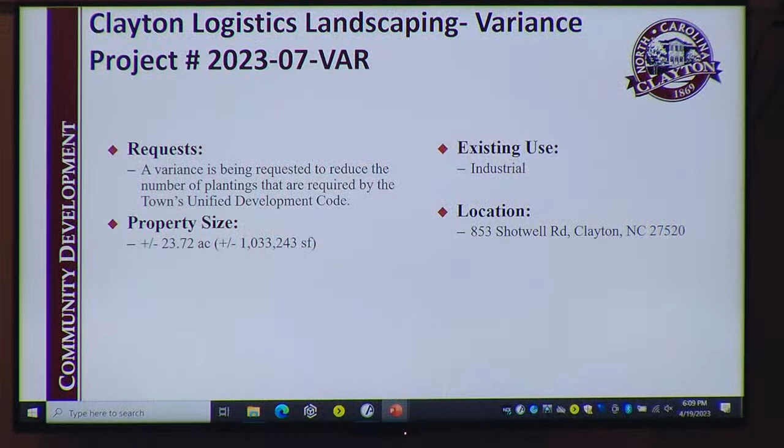Good evening, Chair, Board. Just for the record, my name is Bruce Venable, Town of Clayton Planner 1. I'm here to present the request for the variance for this project. The request is being made to reduce the number of plantings required by code of the town's Unified Development Code, specifically the interior landscaping requirement. The use for this site is industrial. The property size is approximately 23 acres, located off 853 Shotwell Road.

The section of code in question that they're seeking relief from is section 155-402D1, sections A and B. It states: 20% of the total area shall be landscaped. 1 canopy tree, 1 understory tree, and 2 shrubs shall be planted for each 1,000 square feet of required landscape area. Trees need to be evenly planted throughout the landscaped area, but may be staggered or clustered as necessary to maximize visual and screening objectives, and to meet the needs of the particular species for root space, water, light, and air circulation. Landscaping within vehicle use areas may be counted towards the site's interior landscaping requirements. Resource conservation areas may be used to satisfy a maximum of 40% of required landscaping area.

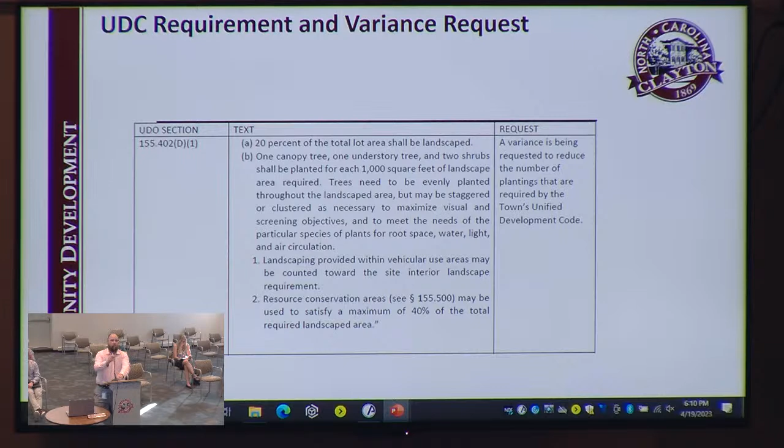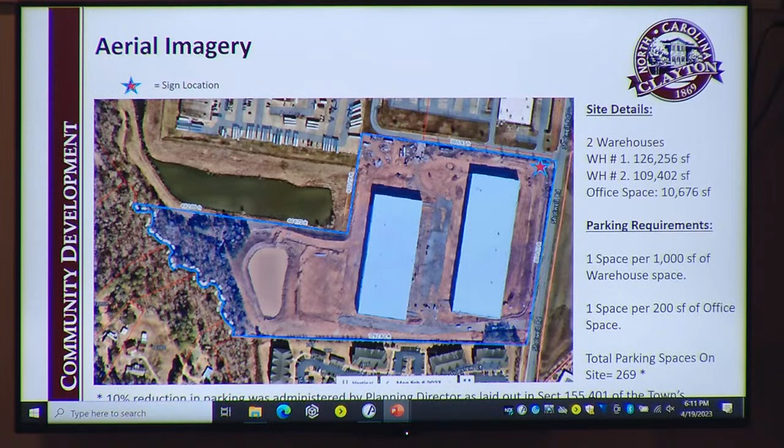Just to bring up to speed, the parking requirement per code is 1 space per 1,000 square feet of warehouse space, 1 space per 200 square feet of office space, bringing the total to above... sorry, it's cut off a bit because of the start bar. The total parking provided on site is 269. This is after a 10% reduction permitted in our Unified Development Code 155-401, where the planning director can make that decision.

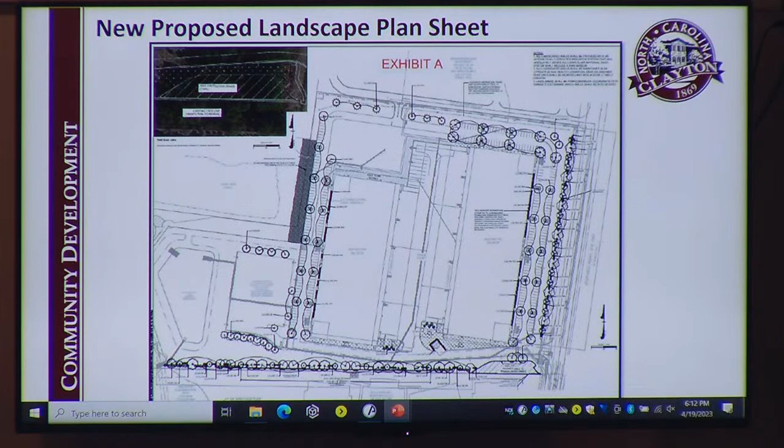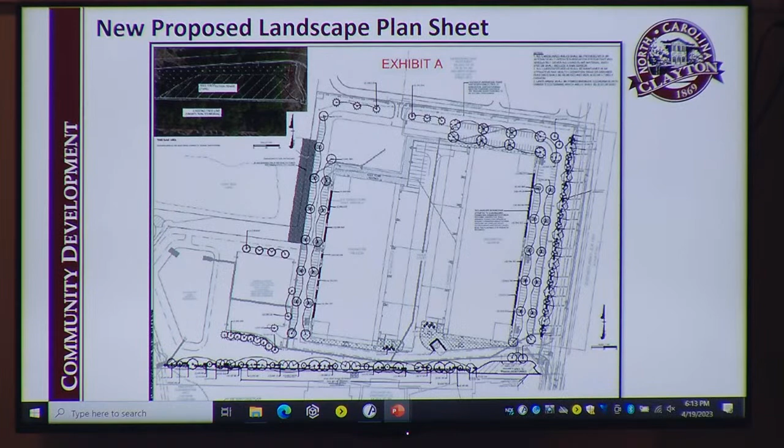Here is the new proposed landscaping sheet. As you can see, there's quite a difference in the number of plantings. There's less crowding. All of the required interior parking landscape trees are present. The required buffers are present along Shotwell Road and into the property to the south.

I will note that the standard for impervious surfaces for this zoning district is 75%. They are currently at 56%, so they're nowhere near hitting their impervious limit. And the building coverage standard is 50%, and their current building coverage is below that as well.

I will allow the applicant to address their findings of fact to you in a moment. I'll just read over the four findings of fact that they're required to cover here, and then I'll provide minimal staff commentary for it.

Number one, unnecessary hardships would result from the strict application of this ordinance. It shall not be necessary to demonstrate that in absence of the variance, no reasonable use can be made of the property. As the site has been developed and built out, there now exists the possibility that strict application of this ordinance may result in undesirable outcomes, which may result in additional financial responsibility by the property owner to replace and maintain these plantings should they be enforced as in the approved plans.

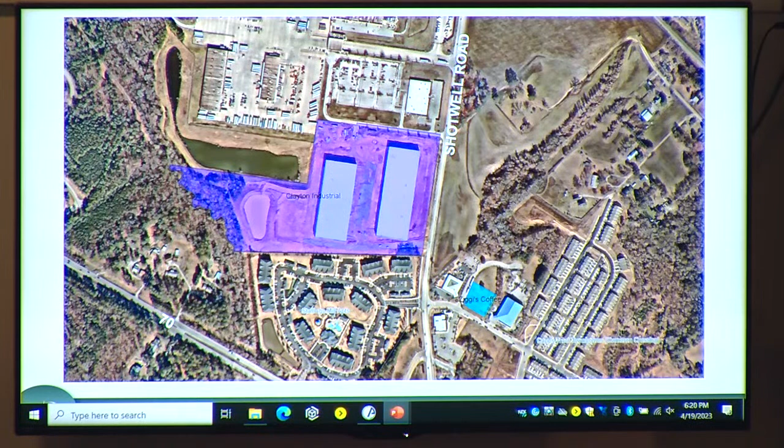This variance relates to the development at 853 Shotwell Road, just south of the Carolinas Distribution Center. To provide some context to this project and the variance request, this site has gone through a number of approvals in the past few years to get to this point, and hopefully this is our last hearing.

Following a recommendation for approval from the planning board, this site was rezoned to the light industrial district in August of 2021. Since then, the site plan and construction drawings received administrative approval in order to allow 2 warehouse buildings with a total of 236,000 square feet of gross floor area, along with the required infrastructure and landscaping improvements.

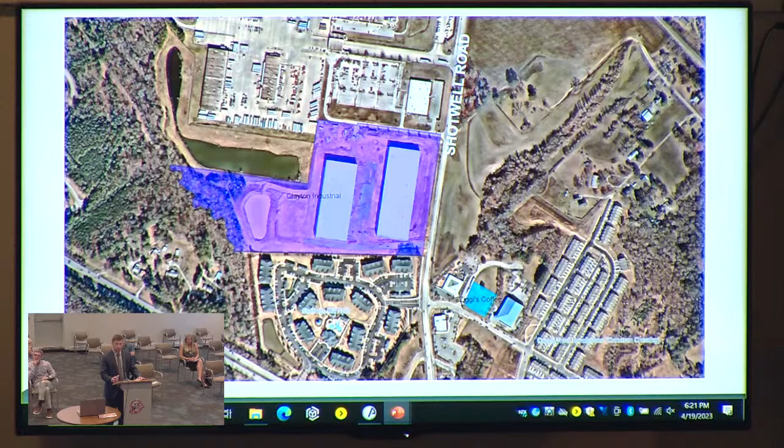The 2 buildings are designed for light warehousing and life science users with smaller local and regional tenants in mind. The buildings can accommodate showrooms in the front with flex space and warehousing space to the rear of the structures. This is distinguishable from the development to the north, the distribution center, which is designed for larger, more frequent transportation needs.

And the timing of this variance request is also not what this board is likely familiar with. These requests are typically presented to you during the site plan phase when these UDC compliance issues are identified and typically dealt with. However, this project is much further along in the process with construction nearing completion.

This was a decision made by my client during the site plan review when the interior landscaping issues were identified. Instead of mitigating the risks of compliance during this site plan review, the decision was made to move forward with the project in an effort to get this project to the market.

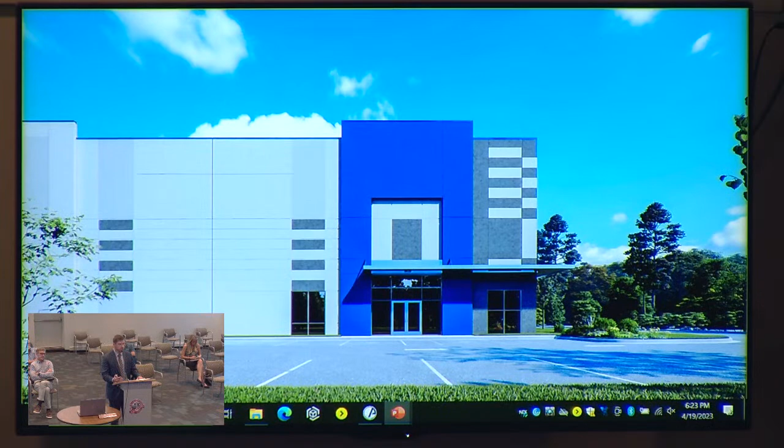So with all of that context in mind, we are here tonight to request a variance to the interior landscaping requirements. The specific UDC section is 155.402D, which requires all site plans, regardless of the type of use, to provide landscaping on 20% of the total site area. This requirement is in addition to the perimeter buffer requirements and the street yard landscaping requirements.

In order for this variance to be granted, we have the burden of producing the information and evidence as to how this request meets the findings described in the UDC. We do have a landscape architect who designed these plans here tonight to provide that information. So at this point, I would like to call up Mike Davidson.

Mr. Davidson, please state your name, address, education, and experience for the board. Sure, board, my name is Mike Davidson. I'm a registered landscape architect here in North Carolina, and I've been doing civil engineering work and landscape architecture work here in North Carolina for over 20 years. My office address is 5410 Trinity Road in Raleigh. I have a Bachelor of Science from the University of Tennessee, and again, have extensive experience with all types of land development projects here in North Carolina.

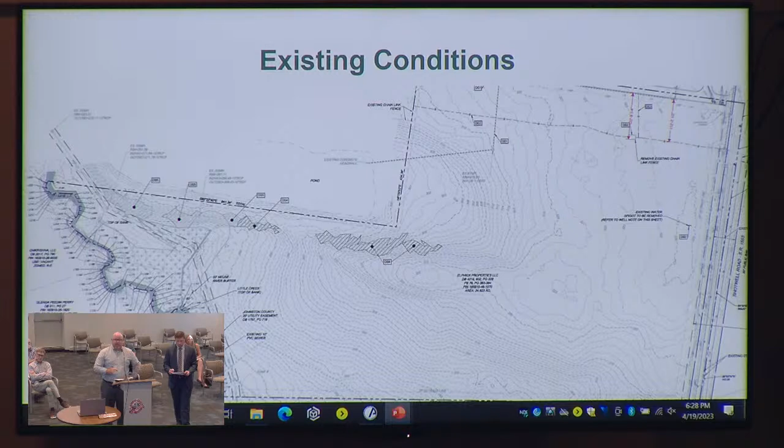That's the existing conditions plan, and Ms. Berry, I can help address the question you had earlier about the slopes. I don't know how familiar the board is with reading topography, but the closer those lines are together, that represents a steepness of slope. So you can see along Shotwell Road it was relatively flat to begin with, but then grades started to steepen and fall off towards the back of the lot before we started doing any site work.

In land development, the first thing we look at is trying to balance the earthwork. We don't want to haul dirt off, we don't want to haul dirt in. We want to just spread it around and try to do it that way. It's most economical for the client, it's better for the environment—everybody seems to win in that condition.

In doing so, we did create some slopes along Shotwell and along City Dump. But again, that was an effort to balance the dirt so that no dirt had to be removed or brought in.

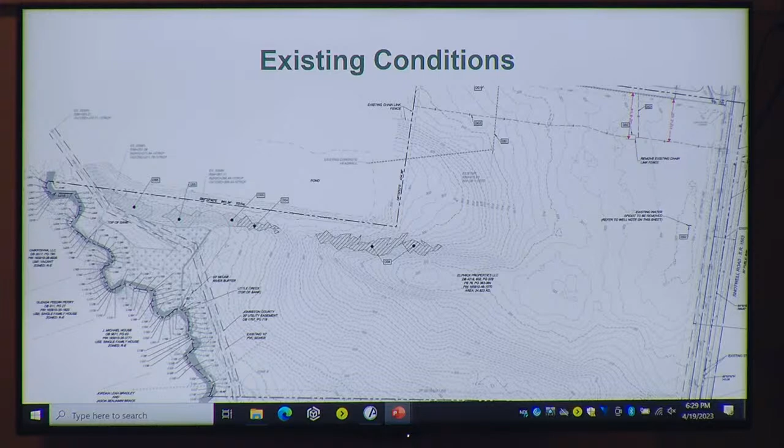Again, the development of the site is not challenging because of the specific use that was proposed. There are other design considerations that made this development challenging regardless of the use—the floodplain, sanitary sewer easements, requirement for stormwater, steeper slopes, et cetera.

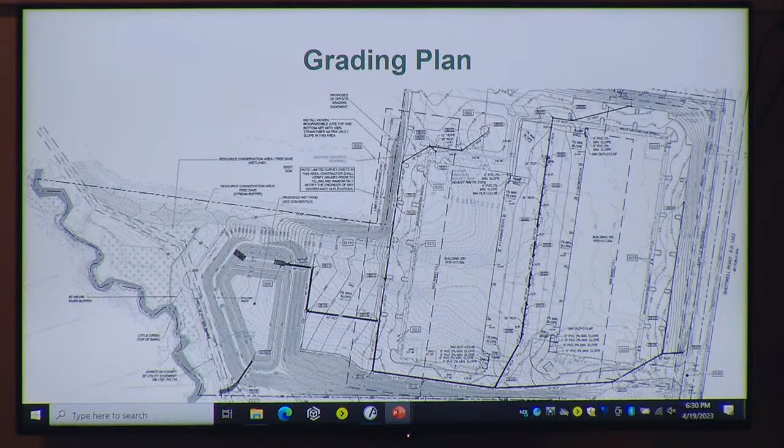If we can go to the approved landscape plan now—there we go. So again, one of the main considerations for landscape architects is not only to comply with the standards in a particular municipality's ordinance, but also for sustainability and thrivability.

We've got a lot of material there that's really encroaching on each other. I would really like to see more areas for planting, to spread those out, to give those trees more room to thrive and survive. But again, we're limited by the amount of topography and steep slopes that we have, and we just really don't have any place else to put them.

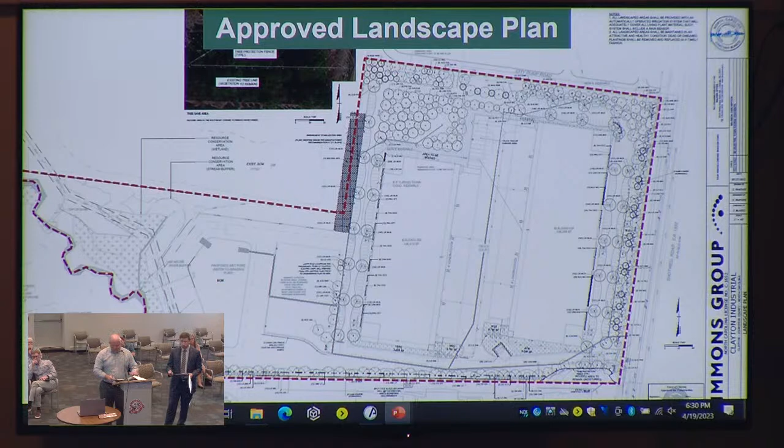Is there any questions that I can answer for the board at this time? Yes, has there been landscaping currently done right now to it? No plant material has been installed yet.

I have a question. You stated that Bermuda grass requires so many hours of sunlight. Is it your testimony that other shade tolerant grasses cannot be planted there? So Bermuda grass is a warm season grass, which does much better in this region than what we would call a cool season grass, which would be fescue.

It's my professional opinion that Bermuda grass is best for the site. It's an aggressive grower. It has a fibrous root system that really does a great job of holding the soils in place. It's an aggressive, fast grower and does best in sunlight, lots of sunlight.

But my question was, are you saying that those grasses would not perform there? Fescue would not perform in this environment? That's my opinion, yes, in this region.

And then my second question is, were you consulted whenever the original site plan was created, whenever it was demonstrated that they would make the plantings that are required by the town? Was I aware of this condition in the UDC? No, were you consulted when the original site plan that showed the plantings was submitted?

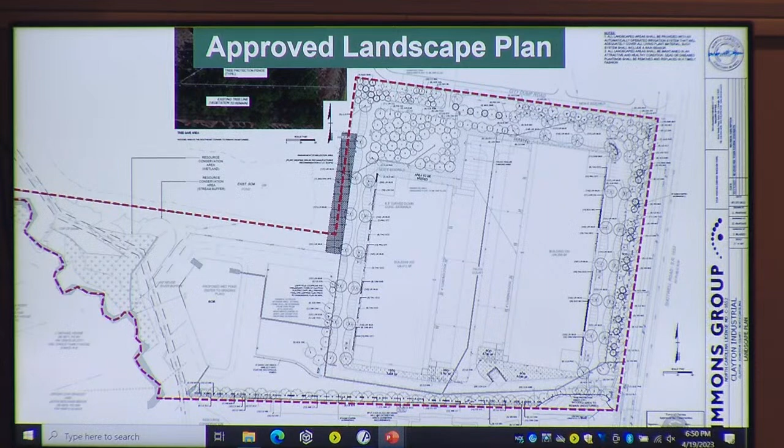Let me move this to the appropriate screen if I can find it for you. The applicant—the original site plan was approved prior to staff's arrival for the town. This particular item is from the administrative amendment they filed, requesting that plantings be moved from the southeast portion of the site to that new location, in order to meet their required interior landscaping requirement by having the plantings moved there. If I may, I'll provide some further clarification for the questions that were asked.

The new area includes 0.85 acres of the conservation resource area, which approximates 37,000 square feet. That, in addition to the 24,000 square feet, comes out to about 61,000 square feet, which is about 5.9 or 6% of the overall site. Just to provide clarification.

So Bruce, I may have missed it. Did either the amended plan that was approved or the original site plan note that area as future parking? If the approved site plan did show it as future parking, the amendment removed that. They amended their site plan, and now this is what, as far as we're concerned, needs to go there unless a variance is granted and the site plan is amended again.

So the amended plan did not show that? No, the amended plan shows the landscaping there. The applicant is within their right to later request and provide a new application, which would then go before the entire technical review committee to determine whether or not it's reasonable and fair. Understood. If I may, the amended plan was just the landscape plan. The other site drawings that indicated it was future parking were not part of that July 22 submission. The approved landscape plan, the approved amendment, is the governing document for this. That site is now landscaped as far as the town is concerned.

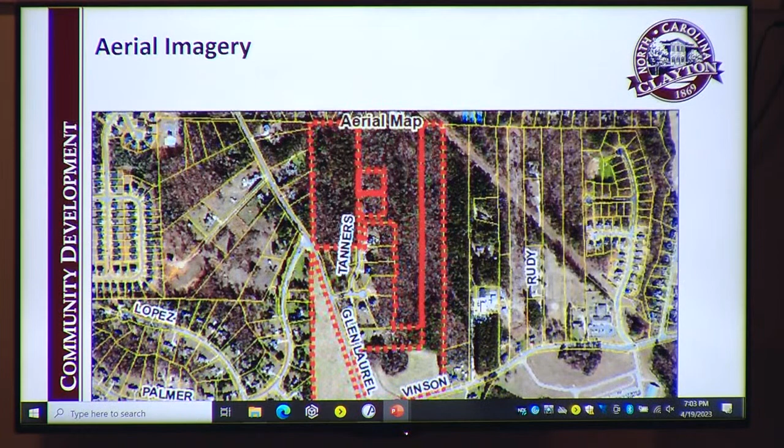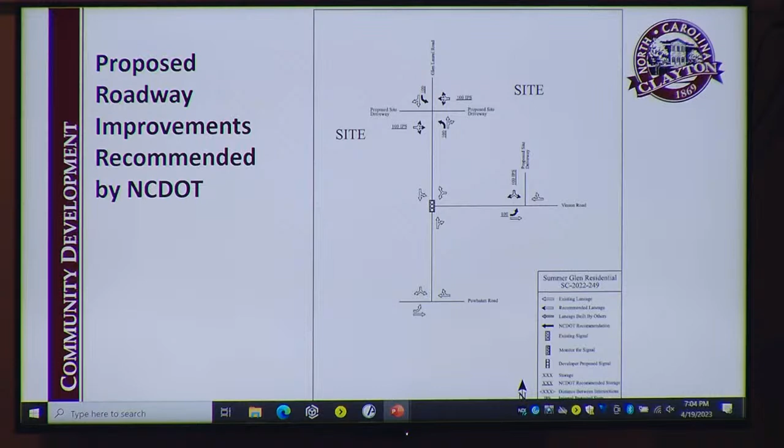This is the proposed roadway improvements recommended or required by NCDOT. As you can see, the only road improvements required are 100-foot-long left turn lanes at their entrances on Glen Laurel Road and a 100-foot-long left turn lane on Vinson Road at their proposed entrance.

The Unified Development Code would require additional frontage improvements in addition to the NCDOT or TIA recommended improvements. As mentioned before, NCDOT for this particular project is only requiring left turn lanes with approximately 100 feet of storage and appropriate deceleration area and tapers.

The 2045 comprehensive plan in the roadway section recommends a 3-lane cross-section with bike lanes, curb and gutter, and sidewalks along both Glen Laurel Road and Vinson Road. This proposed development has approximately 1,500 feet of frontage on Glen Laurel Road and approximately 700 to 800 feet along Vinson Road.

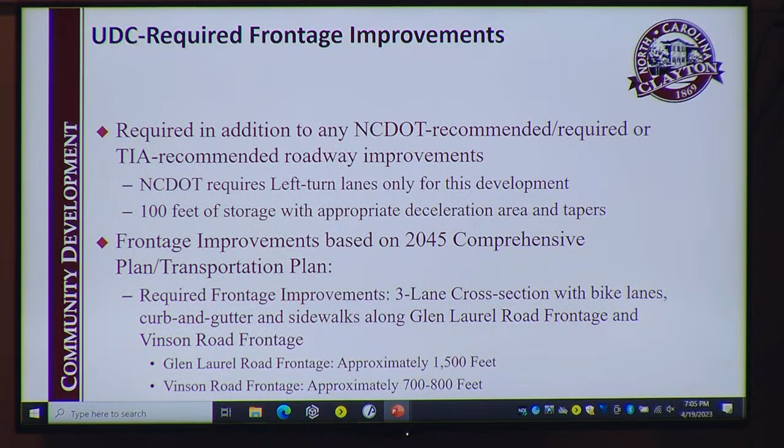For the findings of fact in the staff report, you'll see the findings listed along with the applicant's response and staff commentary. I'm just going to briefly go through the findings and summarize some of the staff commentary, since the applicant is here to present after this.

The first finding is that unnecessary hardship would result from the strict application of the ordinance. It shall not be necessary to demonstrate that in absence of the variance, no reasonable use can be made of the property. The amount of frontage improvements is related to the unique layout of the project and its location along Glen Laurel Road and Vinson Road. The hardship the applicant refers to relates to their specific subdivision proposal, its layout, and the related roadway improvements recommended by the TIA, as well as additional requirements suggested by NCDOT. Public road improvements are required of most, if not all, developments in the town.

Finding of fact number 2 states that the hardship results from conditions that are peculiar to the property, such as location, size, or topography. Hardships resulting from personal circumstances, as well as hardships common to the neighborhood or the general public, may not be the basis for granting a variance. Staff commentary noted that the size and scope of the required improvements relate solely to the proposed project and its corresponding use, layout, and density, which does not constitute a hardship resulting from the peculiarity of the previously mentioned parcels of land.

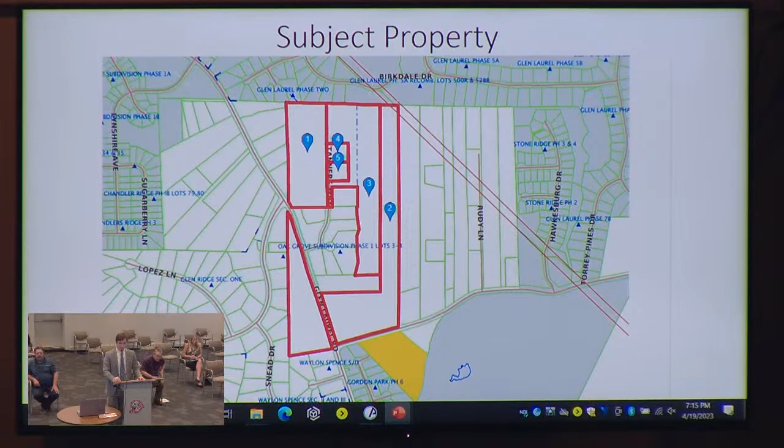Ben did a good job of going through the background information, but just to go through it quickly one more time, this is the site assemblage located in Southeast Clayton, roughly at the corner of Glen Laurel and Vinson Road. Here's an aerial view of the existing conditions on the ground, and here is the current zoning, but as you heard, it's currently under review for a conditional zoning on the property.

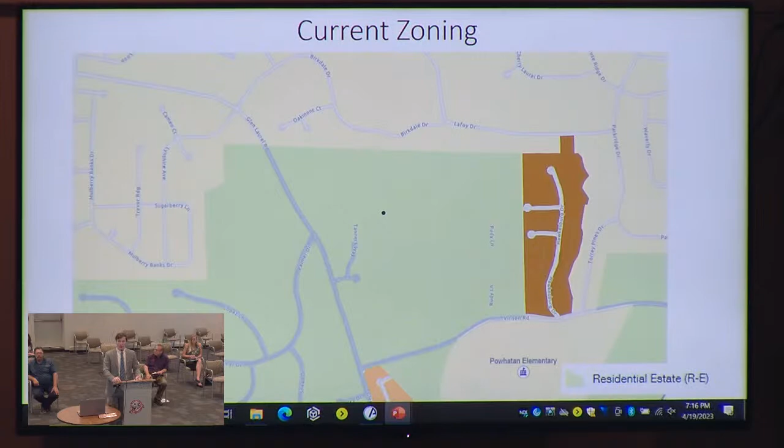So with that, I'm going to ask Andrew Stocks with Stocks Engineering to come give a little more detail about the site specifics. I'm also going to do the tendering of him as an expert.

So just real quickly, Andrew, can you just summarize your educational background and professional licensing experience?

Yes, absolutely. Good afternoon, Mr. Chairman and members of the board. My name is Andrew Stocks. I graduated from North Carolina State University with a degree in civil engineering, and I'm a licensed professional engineer by the state of North Carolina. I have been practicing since 2016, and I've been licensed since 2020.

At this time, we'd like to tender Mr. Stocks as an expert in engineering.

So noted. Thank you. All right, so just to give a general overview of the project, it is located at the intersection of Glen Laurel Road and Vinson Road. The proposed development has around 138 lots. During our sketch plan right now, we are going through a conditional rezoning, as was mentioned, with a master plan.

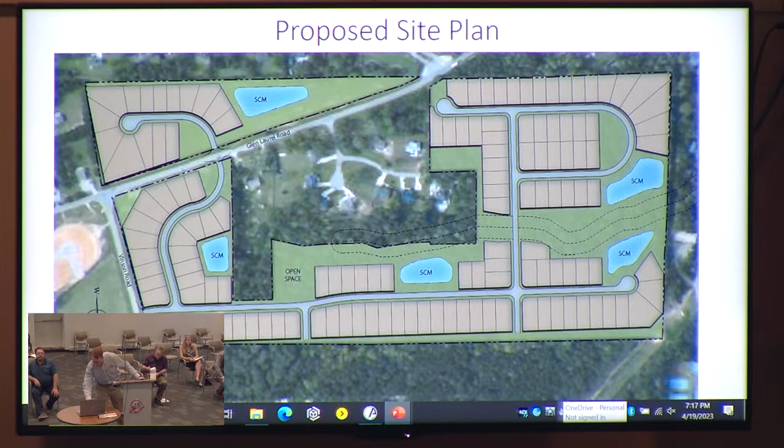So that is why, or I guess the next slide—okay, gotcha. So this is our current master plan that is currently attached to the conditional rezoning request. It is not currently within the town limits, so we will be annexing the property with the development of this project.

The project will have the town of Clayton water, sewer, and electric, so we'll be a customer of the town in those areas.

You can see just with the previous plan with the aerial view and this plan, it is a very unique property with multiple accesses to Glen Laurel and Vinson Road. So we are proposing two full accesses to Glen Laurel Road that are across from each other to access both sides of the property, and one access to Vinson Road.

There will be an emergency fire access in the northwestern corner, which is the top center of the plan where the cul-de-sac is. That will be emergency access only.

The reason we have not shown a full access there is due to the nature of the alignment with the subdivision across the street. The North Carolina Department of Transportation does not like to have roads connecting to main roads that are not aligned—it just provides traffic confusion at those intersections. So we have looked at the opportunity to provide that as just an emergency access where the general public would not be accessing it regularly.

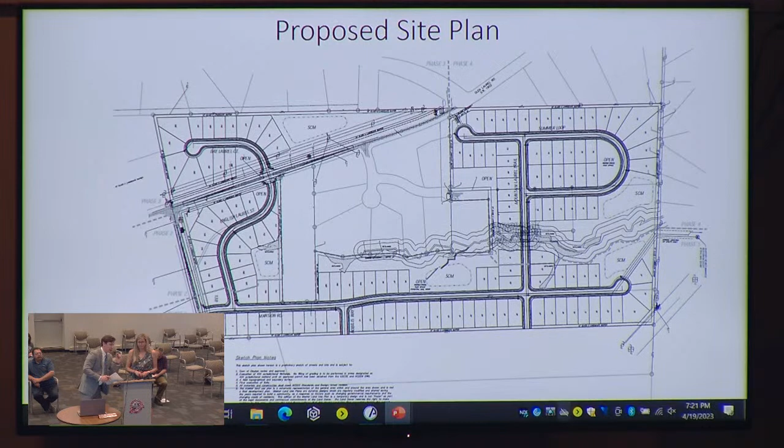Chairman, at this time, I'd like to tender Ms. Chase as an expert in traffic engineering. So noted. Thank you.

We want to take a moment to walk through the roadway frontage widening requirements that would be associated with satisfying UDO requirements. So the aerial shows the intersection of Glen Laurel Road and Vinson Road, with our site to the north of Vinson Road on the east and west side of Glen Laurel.

The roadway system map, taken from the town's comprehensive growth plan, depicts the cross-section requirements for the roadways. You can see that Glen Laurel and Vinson are shown in green, which designates one of four cross-sections listed: 2L, 3A, 3B, and 3C. And we understand that 3C is recommended for both Glen Laurel and Vinson Road.

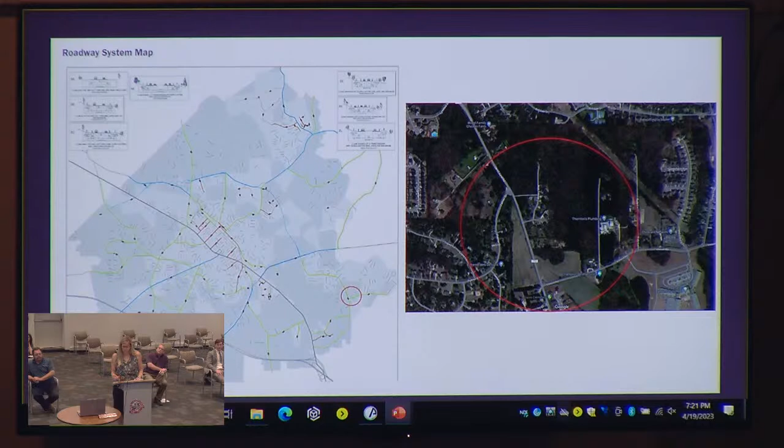As you can see from the slide, the 3C cross-section for Glen Laurel and Vinson requires 80 feet of right-of-way. This would include 3 lanes, 1 in each direction, and a center two-way left turn lane, bike lanes, sidewalks, utility strips, and curb and gutter on both sides, as well as some additional right-of-way outside of those sidewalks.

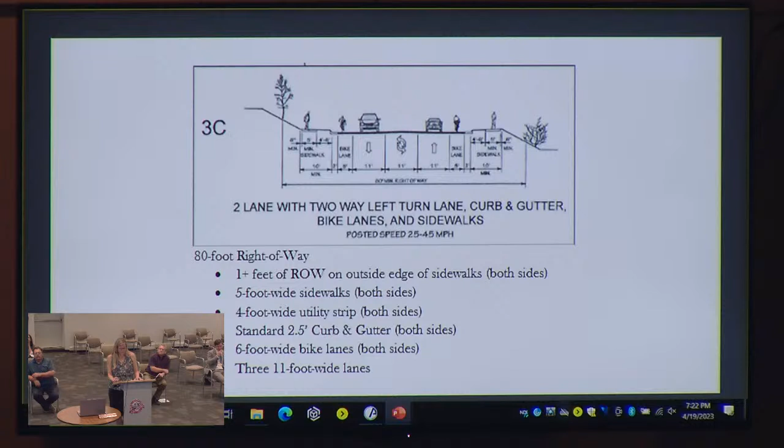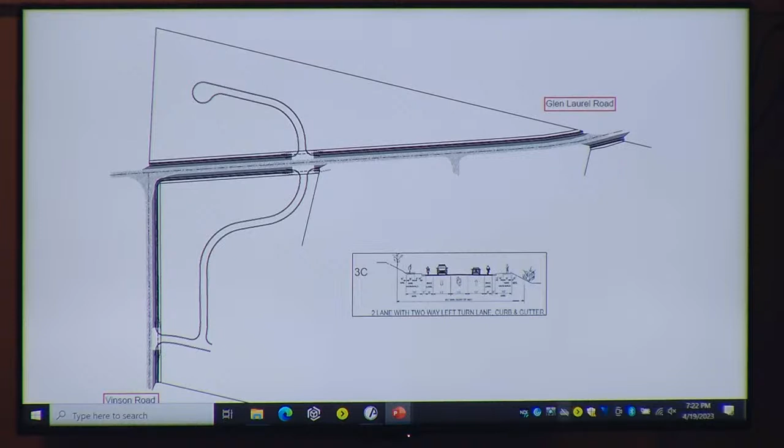We worked closely with DOT and the town to prepare a traffic impact analysis to determine improvements needed to mitigate the impact of the proposed site. The study looked at the intersections of Glen Laurel and Powhatan Road, Glen Laurel Road at Vinson Road, as well as the proposed site driveways on Glen Laurel Road and Vinson Road. The study showed the proposed site traffic has minimal impact on the projected delay experienced at each of these study intersections.

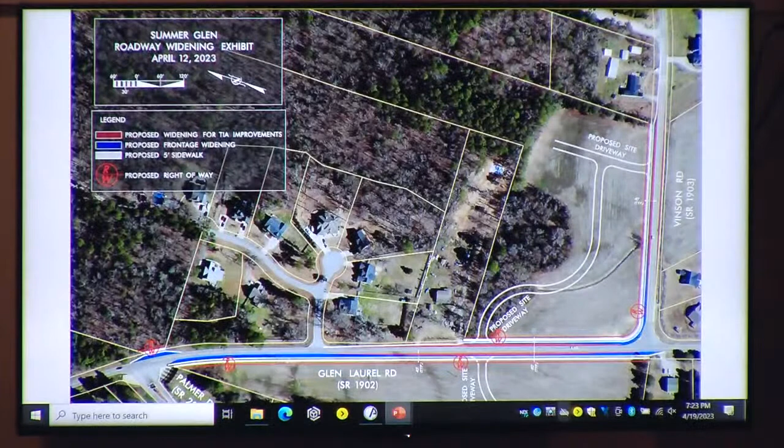Based on the traffic volume at the proposed site driveways, left turn lanes are required on Glen Laurel Road and on Vinson Road into the site. This graphic was prepared by NCDOT and just depicts where those turn lanes are.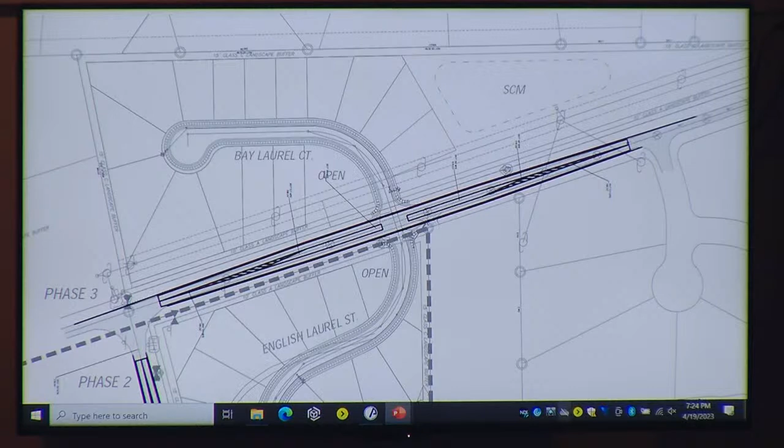This exhibit shows those left turn lanes, the northbound and southbound left turn lanes on Glen Laurel laid out, as well as the necessary taper to tie back into that existing cross-section. This exhibit shows the same on Vinson. And this exhibit doesn't have any improvements on it because none was required as part of the TIA in this area—that's Palmer Drive.

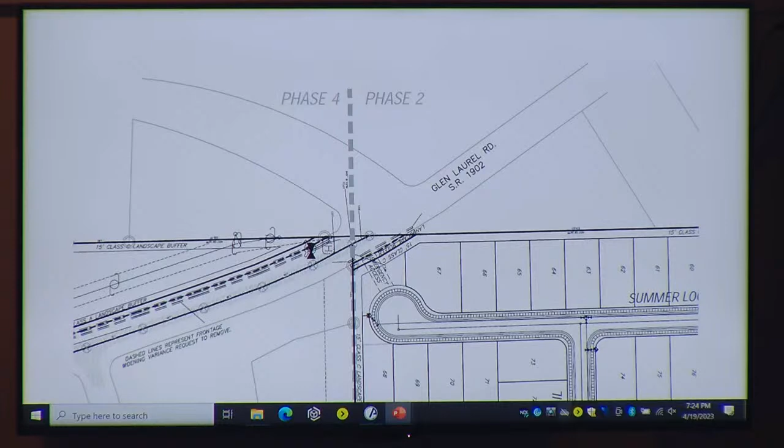Turn it back over to you.

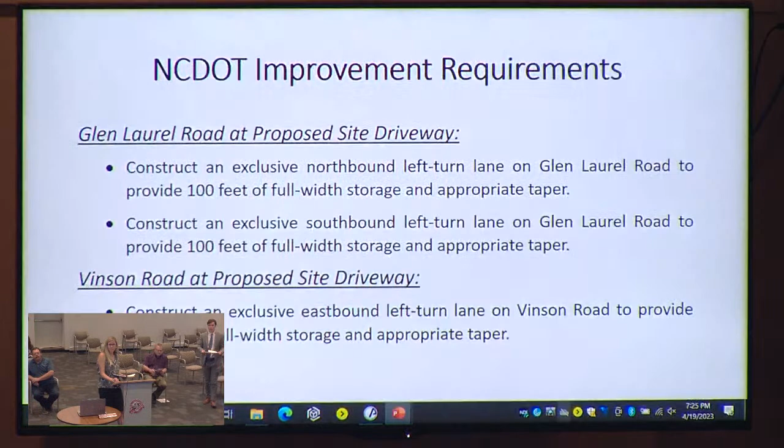One final set of slides we wanted to share with the board is these kind of unintended consequences. Our engineering team, through their experience, is aware of these types of large roadway improvements that have been required in parts of town that are more rural in nature and may not expect full connection to be coming in the near future—and the unintended roadway consequences that can come with it, which we believe justify a more moderate set of roadway improvements.

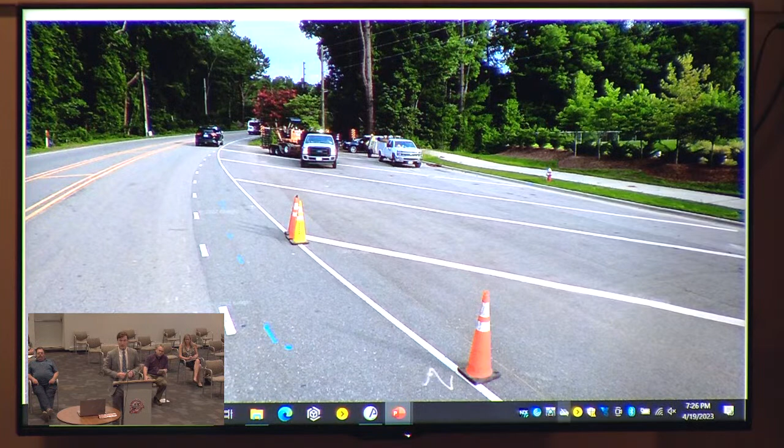Here's a street view of that same site. You can see that large striped right-of-way area with vehicles and equipment and all sorts of stuff parking in there, which is apparently quite common. You also see this sharp tapering from that very wide area down to the 2-lane as you move away from the improved area.

Just to put that into context with our site—orienting you, plan north right now—that residential property located right to the north of where our property ends on Vinson Road is what we think of as a classic example of something that's unlikely to be redeveloped. As you can see, there's a house and a driveway located right on that property, falling outside the scope of our development, unlikely to be folded into a surrounding subdivision, and would be highly impacted.

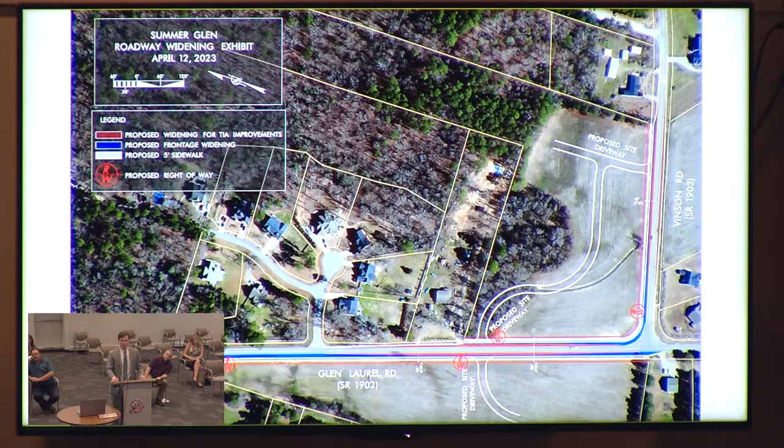And essentially, what you'd find at the end of our site is something that looks like what we just showed you. Similar conditions would exist on the plan southeast, at the very bottom right corner, where that blue runs into that residential property. Again, that's where you see those types of conditions, as well as moving down to the bottom left along Glen Laurel, where those blue areas would be dedicated areas that do not have corresponding areas across the street and would end up being large, temporarily at least, unusable right-of-way.

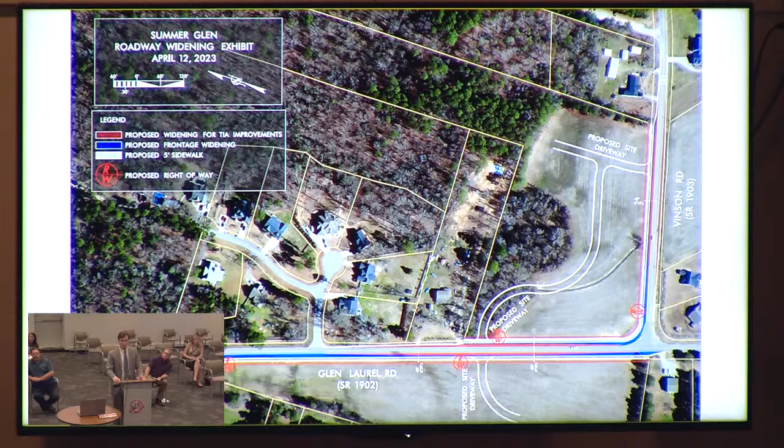Therefore, based on the expert evidence presented this evening, we feel strongly that all the variance standards have been met, such that the requested relief from the streetscape improvement is justified.

First, just to reiterate, strict application of the code we do believe would result in unnecessary hardship because, given the particular context of this property, its unique shape, its location within the town's planning jurisdiction, strict application of the transportation plan's unique enhanced requirements along those green lines become, in the context of this unique property, so burdensome that what we are proposing, which is the highest and best use of the property, is having extreme difficulties absorbing those costs in a practical way. When that level of development barrier exists, we do believe a hardship is present.

In addition, these 3C improvements that you saw along those green lines are the only roads in that whole area that those requirements exist for. Those requirements go substantially above and beyond what the ordinary UDO would require. That's why Andrew was mentioning developments in the area of similar size and scale where nothing close to this level of improvement was required. So therefore, that substantial difference, despite being similarly situated, and the fact that it results in what could, quite frankly, be a less desirable roadway configuration—given that it's unlikely those residential houses right adjacent to our development are ever going to continue these multi-use paths—makes these substantial, very expensive roadway improvements.

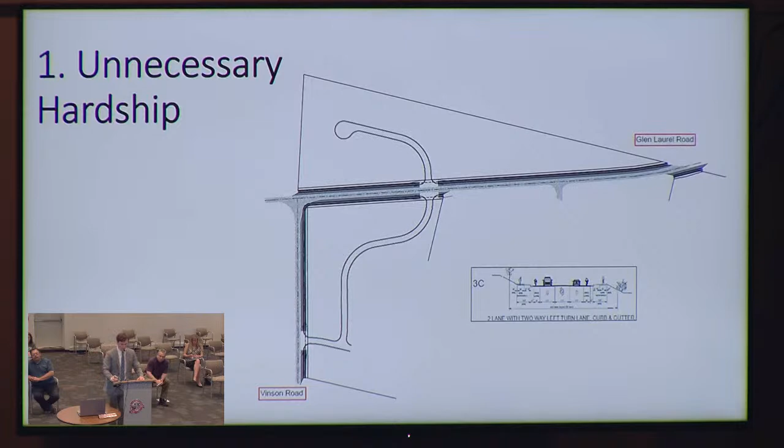It is peculiar to the property. The hardship results from multiple unique factors that exist on site, but primarily because we are located at this specific intersection of those two green lines, making us one of the only rural intersections in this area that have been designated by the transportation plan to provide this substantial type 3C streetscape instead of the ordinary streetscape that the TIA would recommend. And that's in addition to the unique shape of the assemblage, the surrounding rural context of the development in the area, and our location within the larger planning jurisdiction. We think all of those are factors that set this development apart and justify some amount of flexibility regarding those substantial 3C requirements.

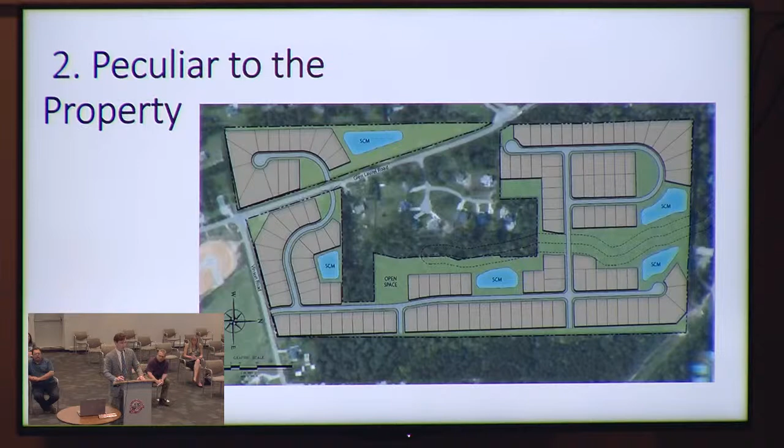As you heard already, this was a result of the application of this map, which applies categorically to all properties that are adjacent to the highlighted roads. So it is the application of this map, instead of the ordinary UDC requirements, that creates this hardship.

And finally, we believe it is consistent with the spirit and purpose of the code. The UDC specifically acknowledges that there is some nuance, some flexibility that should be engaged with when applying these transportation plan streetscape requirements. As I mentioned earlier, it specifically empowers the board to approve alternative requirements. So simply coming in and asking for an alternative doesn't make it inconsistent with the code. The code provides a mechanism for relief, and that's what we're here for.

In addition, the development improvements proposed, we believe—and the TIA supports—address all traffic and safety concerns raised by the TIA. It accounts for future growth in the area, and importantly, it provides consistency with the existing and planned rural residential nature of this area. And as you saw, we believe it also prevents potentially hazardous roadway conditions.

For all those reasons, we respectfully request that you grant this variance, and the development team and engineers are happy to take any questions you may have.

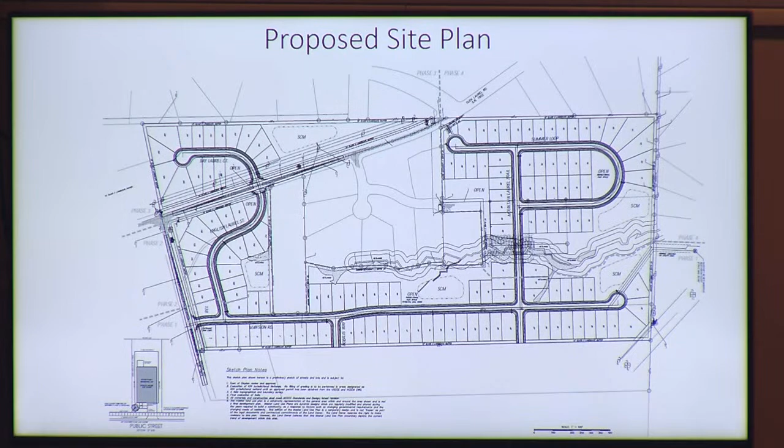So yeah, we'll be engaging in all of the streetscape internal to the site, no exceptions, no variances being requested. It is limited specifically to just that outer edge along Vinson, in that area, mostly along that triangle, the top triangle running along Glen Laurel. To put it in context, the specific dimensions of our request are best visualized here.

So that would be a variance to request no curb, gutter, sidewalk, or the additional widening. Yes, a lot of the sidewalk, the no bike lane - yeah, exactly. A lot of those things would be reduced.

I think maybe Andrew or Brittany can go into a little bit more detail. I know we have those close-ups of what we're providing, so they can explain what's being provided there.

The request for the variance would just be to reduce the requirement to the DOT's approved turn lanes - so not the full frontage widening, but we would still plan to install the left turn lanes at each of the 3 entrances. So basically, you're offering to install the requirements requested from the TIA, but not the town's curb, gutter, sidewalk, and additional paving to the street section approved by the town. Yes, sir, that's correct.

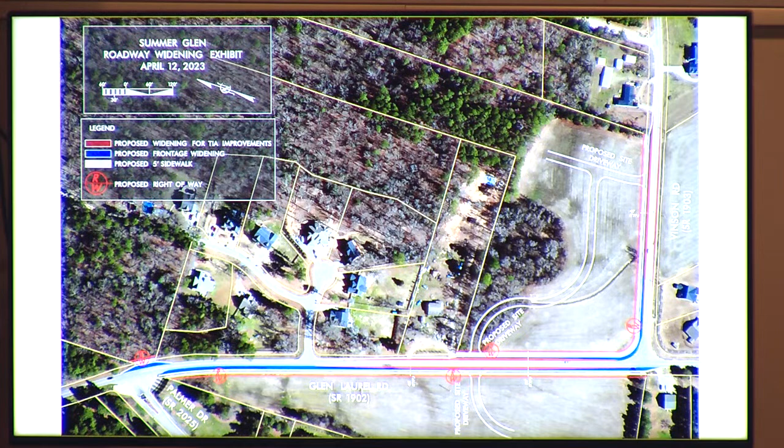In this case, the largest area, including that bike lane area, is about 12 feet of additional pavement, and that would be only outside of the red areas outlined on this map.

Based on the expert testimony I'm providing tonight as a professional engineer in the state of North Carolina, I do not believe the applicant has been able to meet finding of fact number 4: the requested variance being consistent with the spirit, purpose, and intent of the ordinance such that public safety is secured and substantial justice is achieved.

As I've mentioned, the proposed variance the applicant has requested consideration of tonight would result in minimal transportation improvements which do not meet the spirit and intent of Chapter 155.600 of the Unified Development Code. In addition, the lack of multimodal transportation elements and inter-subdivision connectivity poses a significant safety concern and will not ensure public safety is secured as intended by that finding of fact.

Additionally, approval of this variance would open up a playing field for all future development in the town of Clayton to request and seek variances to remove the requirement of frontage improvements due to the amount of linear footage that their property endures.

And finally, the applicant has spoken several times about flexibility, and from my professional opinion, flexibility would be conceding and providing at least a portion of the improvements, which has not been requested here tonight. Thank you.

My name is Jack McDougall. I live in Glen Laurel.

The actual road widening that they're proposing here would probably help. We get a lot of people cutting through the Glen Laurel subdivision in the morning, mostly because of the layout of the school. We get the same thing in the evening because when you come up Glen Laurel Road, you can't turn left because they're lined up from the school. That seems to be a problem quite a bit.

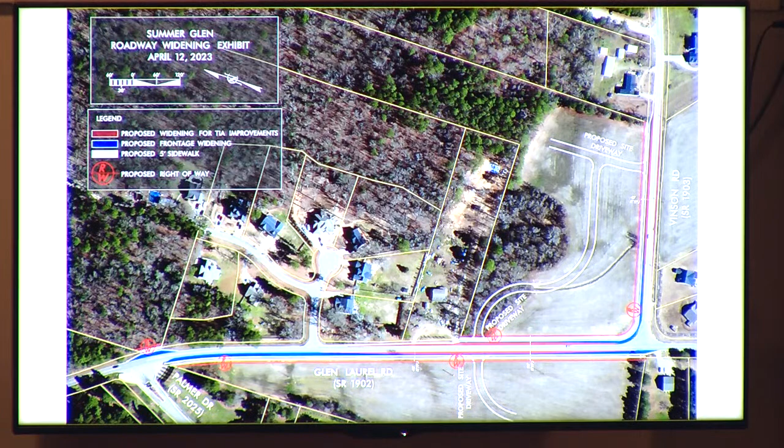Thank you. And just to clarify what we're talking about, this 3C improvement is a result of that Clayton roadway systems map that designates Vinson and Glen Laurel as heightened streetscapes for that 3C requirement, which does not exist on the surrounding improvements. It's just Glen Laurel and Vinson.

Can you clarify that again? I'll back it up. Just want to clarify that the roadway improvement requirements result only from this designation as the green line. That is where these 3C requirements are deriving from — particular to the curb and gutter, sidewalk, potential storm drainage, and the additional asphalt widening that would occur outside of the tapers and the appropriate turn lanes proposed, as shown on that red and blue map that we just moved from.

It's okay. Okay, perfect. Yeah, I think I'm going to use — I don't mean to undo what we just did.

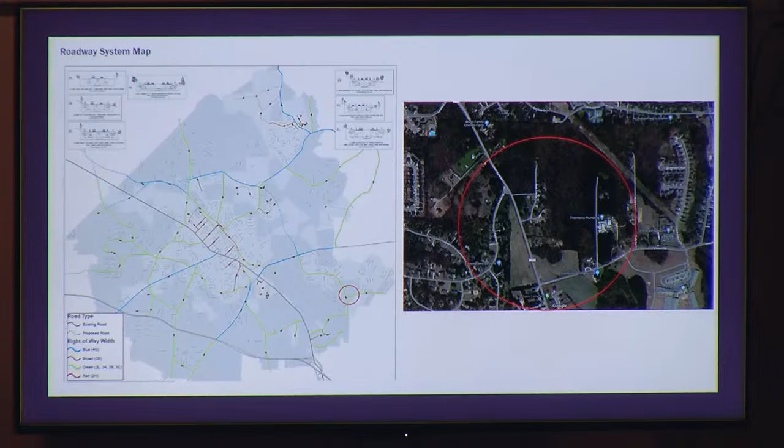I'm curious, did you analyze any recently approved subdivisions in this area that didn't fall on the green line, such that these more substantial improvements are required? Can you elaborate on the analysis of those developments? Yes, I'm curious if you looked at developments in the area of similar size and scale that did not fall along the green line or the 3C requirements.

Not in the immediate vicinity, because there are none that have been recently reviewed or approved since this ordinance was adopted by the town council. But I could certainly provide a list of at least 10 projects in town that have performed frontage improvements likely resulting in a similar number of lots and density, though I would need some time to look that up. Okay, thank you.

Anyone else would like to speak? Okay, hearing none, we'll close the public hearing and bring the item back to the board for discussion.

Any general comments before we go through the findings of fact? Yeah, I'd like to ask counsel a couple of questions about statements he made in his presentation, if that's appropriate.

Sure, of course. You made a statement regarding the TIA, and you said the DOT reviewed and approved the TIA, but I didn't see that in the record. I saw a recommendation, but not an approval. Can you clarify what that means?